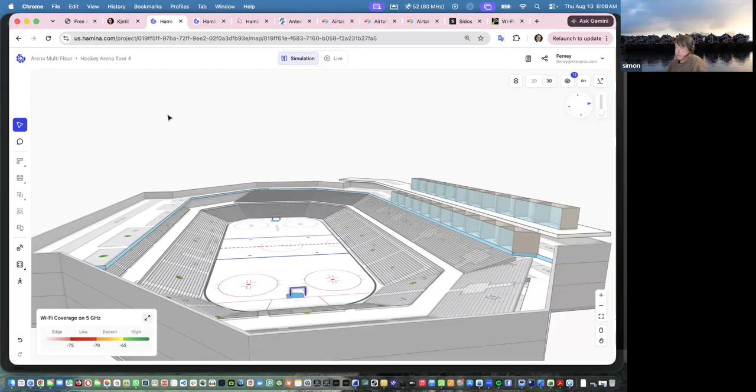I was just going to ask about the warehouse floor plan, where you have the ground level, you have a mezzanine warehouse with mezzanine office, but the floor plans you're given - the ground level is a full floor plan, but for the mezzanine level it's just that small little strip of floor area. So how do you handle that? I've had that happen, where they give you - what he's asking is if I go to a warehouse, let's see, sometimes they have the first floor with a lot of stuff, and let's say the second floor is just this small area. So they give you another small floor plan. So what you do is you import the big plan and then you import the small plan. Actually, we could probably do this - watch, let me see if I can just get a screenshot of this.

Let's say here. I'll just say we're going to make this a second floor plan, okay? So we have this as the main floor plan. Let's add.

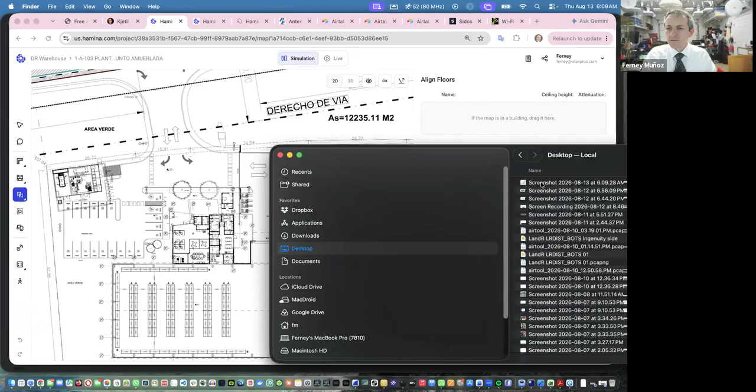Jerry said that I could just drag that file in here. Let me just see if... uploading maps, man, that's really cool. I just drag it in there and it's uploading the map. Okay, so now I have this floor plan and I have this one.

Let me make this floor 2 offices, floor 2 offices. Okay, so I renamed that floor plan. Now I create the building.

The first floor then is going to be this guy. The second floor, I'm going to put on top of that guy. But yeah, see, one is huge, the other one is just the office. So very straightforward, what I do is I just resize this

to fit on the area where only a second floor exists. This is going to be the exact same thing for the... okay, let me see, let me line this up.

Where are my eyes, Simon? You can line the circles, it will be easier. What was that? The two circles, if you line the two circles. If I line the two circles. Oh, like the circle, these guys here.

Let me just grab like these guys right here, and then let's see, try to stretch this guy out like that. Does that make sense? Yep. Okay, so now if I

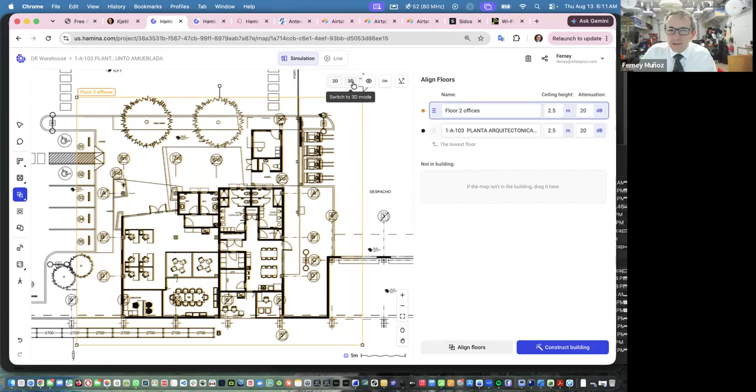So now that it's lined up, let's go to 3D. Holy smokes, isn't this cool? So let's see, of course there's a lot that needs to be done. It's not perfect, it's not gonna do the entire thing for you. That's what I experienced with the big convention center, but it gets you there, it gets you started.

We are on the lower floor, and now if we go to the second floor, it did a better job. And look at this. Now, if I go to sandwich these guys... oh man, isn't that cool? Look at that.

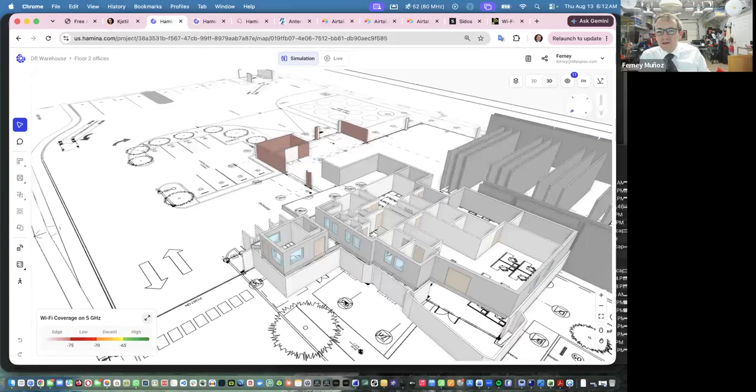I mean, yeah, there's still work that needs to be done here, but one thing I could do, since it did a better job on the top one, I can just copy paste that stuff and go to the first floor and replicate it really quick. But then now I just added, see, this warehouse, lower floor, and then here's the upper floor. And that's the same thing you would do in an office.

Did that address your concern, Simon? Okay, yes, thank you. All right, I'll send you a bill later. Hey, that's consulting, man. Thank you for bringing that up.

See, we spent like a whole week in Hamina, I didn't cover that, so thanks for bringing that up. And you know what happened, Simon was going to keep it to himself. He asked me after we were done with the recording yesterday, and I told him, like, why are you asking now? Why didn't you ask in class so we could let everybody know about it? So I'm glad you did, because now it is recorded, and now you know how to add when you...

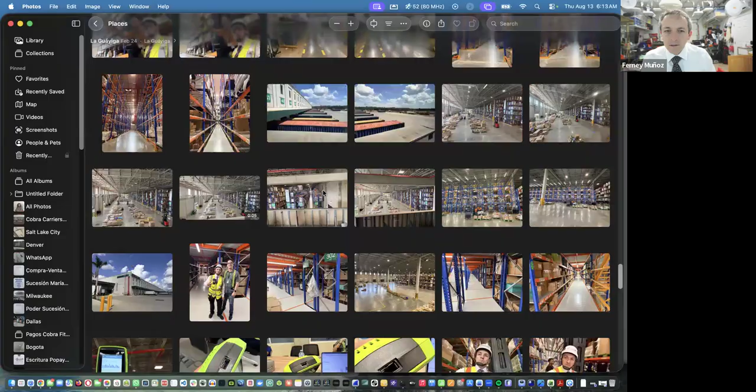This is the exact same thing that happens in warehouses. I think we were just here... this is not the place, but let's go to a warehouse where we had some pictures to show that. See, here in Santo Domingo, and that would be doing this area. So they give you one floor plan, sometimes just one floor plan, and then there are these offices stuck on top of each other. Or like what Jerry showed yesterday, you get the racks in the middle, and that would be like this area over there.

I probably have a better picture here. Hang on, because what he was showing us yesterday was, let's see, kind of like this area.

Uh-oh, I think power went out. If I lose you guys, let me know. I think a UPS just beeped.

See, there are the racks over there that go all the way to the ceiling, and this is a multi-floor area. There's one floor there, another floor, another floor, and a fourth floor within one. So this will be a good example of what we did yesterday. What he taught us was just having one floor that is really tall, with other floors in between that big floor. So this would be another way that if they just give you one set of floor plans, or a small floor plan, you're just lining them up on top of each other inside the big area.

Glenn: I've had this a couple of times where they gave separate small floor plans, meaning you had one big ground floor, but then different plans for the stages on top of it. It's quite easy if it's just one part, or if they are all together on one big floor plan. But if you have, let's say, the second floor split into two different plans, there's no way, as far as I know at the moment, of importing them in the solutions I used.

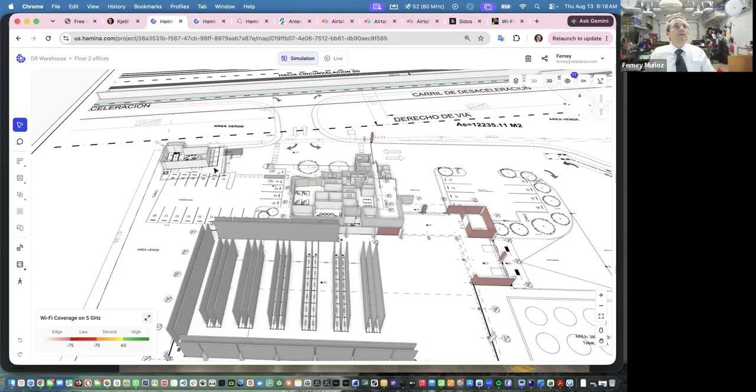It would be easier if you could just take a plan, say this is like with the points in Ekahau - you say this plan has point 1 and 2, and it goes on 1 and 2. This one has 3 and 4, and it goes on 3 and 4, and then it's done - the floor alignment points. Yeah, which is kind of like what we do here, it's just that we get it more visual.

But imagine that you have the one in black that you've done now, and also the one where your mouse was on the left top corner, that you have a separate plan of that one as well. It would be cool if you could paste that one on top of that one, within the same floor. Do you understand what I mean? I guess you could, because we're just designing as we did yesterday - you just bring that other floor plan, and then you would put it...

I assume that it then thinks there's a floor of 2.5 meters in between where nothing sits. Yeah, you'll have to just play with heights of things, as we did with the first round at the stadium, right?

I had to do that multiple times when they gave me those floor plans. I use this tool called Photopea. Where is it? Right there, this guy. Let me just open... I don't know, maybe that image I just got in.

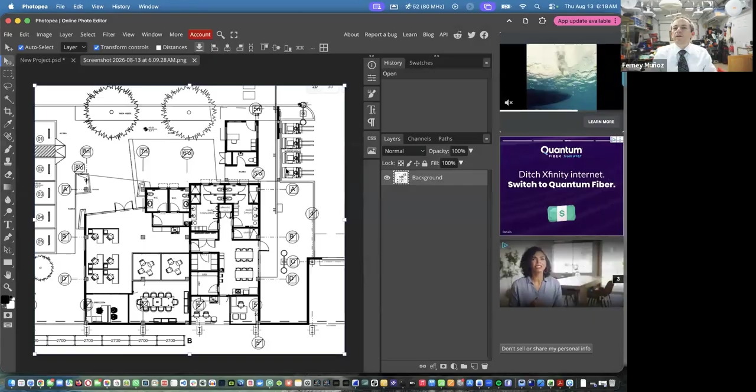So in here, you can just create a big canvas and put the images side by side. Like if I get, let's say this is one floor plan - let me go back. No, I did that in Paint.net, where you take the ground floor as one layer and paste the other ones on a second layer, moving them around to see where they are, so it roughly matches. But it would be cool if you could just do that in the interface itself. I had that many times, where they give you a multi-building campus with multiple floor plans, buildings that are side to side.

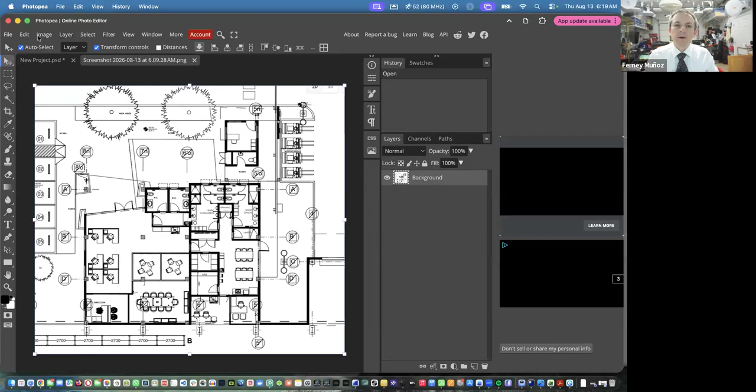So to do a prediction, I just had to do this, and then go to image and canvas size, and make this, let's say, 3,000 by 3,000.

So now a floor plan is there. Let me just move this guy to the side. Then I can just now bring the other image, open. Let's open the other screenshot. And then I'm gonna Control X this guy

and Control V that guy over here. Uh-oh, there you go. So Control C and Control V. And now I can just bring this floor plan, put it next to it. Where do they line up? Here, maybe?

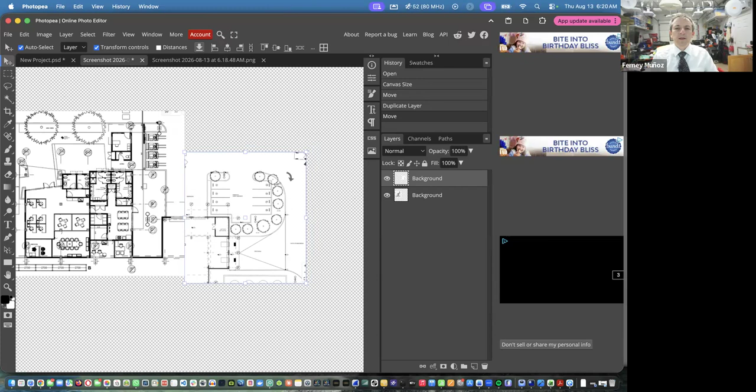Okay, and then now I'll have this in the same level, and then I'll just export this or change the size. Sometimes it's just time of playing with this stuff. But I can see if I flatten this image, if I go to image and flatten this guy, where do I flatten this? Well, I guess if I right click here and flatten image, now I have the image right there.

Of course, I'll be more precise. Well, I think that's precise enough, isn't it? And then this will be my floor plan. I can just export this as PNG or JPEG or PDF, whatever you want to export this as. And now it's just one floor plan in one level.

That happens sometimes, that they give you floor plans like in Excel, just boxes. They're not to scale, they don't have doors, they don't have anything. So I've had many times to go to Google Maps also to at least get the shell of the building and get the scale. Because if I don't have a scale, going to Google Maps, for instance, is one of the things I use.

If this is the building I need, let's say that Costco right there, and that's a warehouse, and that's all I have, then I'll come here, and if I right click on this corner and measure distance, and then right click and click on this corner, it'll just give me a straight line from those two points. And it says that is 137 meters, 138 meters. So sometimes that's what I use for scale, and sometimes that's what I use for at least the outside of the building.

Okay, but this one I had to do also because sometimes they just give you the whole floor plan of the warehouse, and then they give you a big floor plan for the first one, and then tiny maps, just an individual map. That's how you line it up and stretch it out in a way that it's like, oh, this is what's on top of that. And now you have a building. We go to 3D, and we can just create the building.

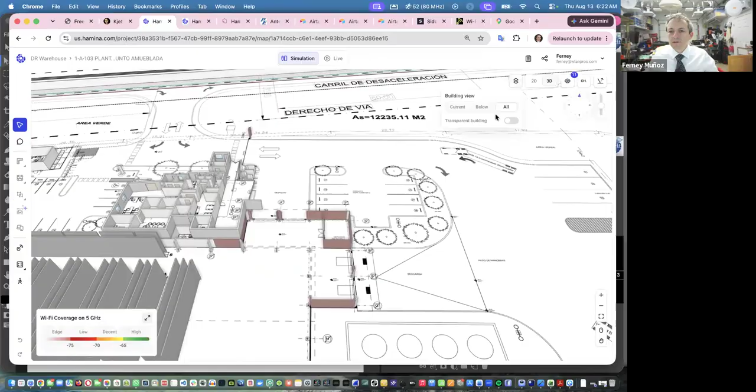All right, thank you, Simon.

We'll come back to Hamina because we'll be doing surveys later, and then we'll use all the tools. Remember, we also cover creating the reports, PDF, and sharing those links with customers. Or if I have another person that has a Hamina account, I can just come here to this button and share that, and I'll be sharing the project with that person. So they will have access to the project and they can work on it. You can have multiple people working on a design or multiple people working on a survey. So that's another way to share.

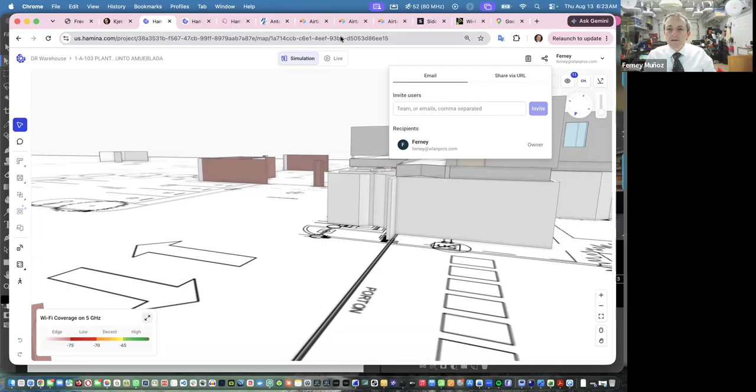SIDOS, did you guys create the account okay? SIDOS systems? Yes, I filled the form but I haven't received an email. Yep, same here. Oh. So has anybody received the email yet? Simon, you still have a question, or you just forgot to lower your hand? Put it down, man, it's going to turn blue.

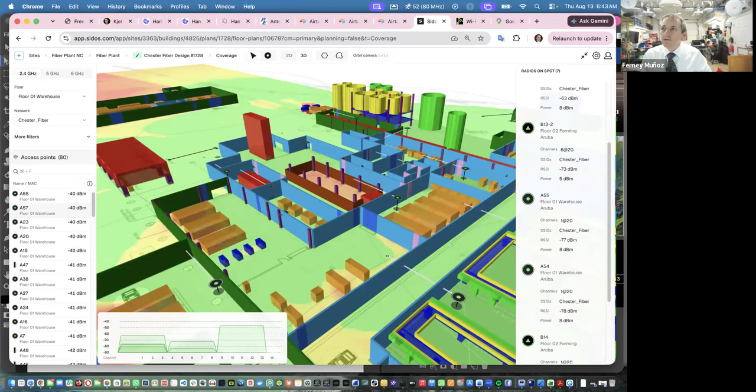All right, after a pause trying to figure out the accounts to let everybody in, we're back. So once you have the account, let me just, they've changed the interface a little bit. So you'll just go in and you're probably going to have a blank page, like it says new site. That's about it. Okay, so all of these are projects I've created.

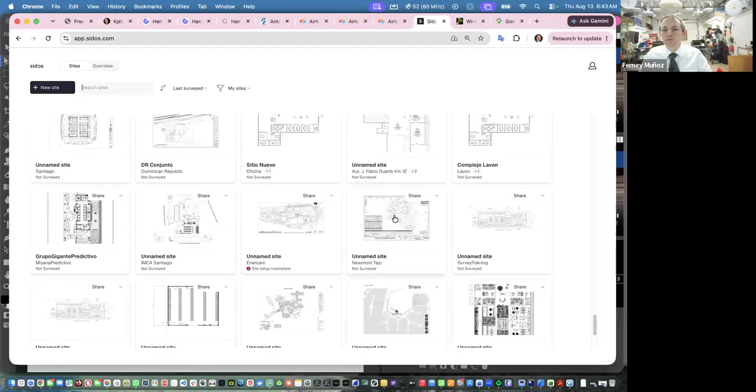What do you mean, Luke? What content can I be viewed? I think you were trying to share the floor plan and I couldn't, yeah, all I'm seeing is this content can be viewed here in the chat. I put them all in the chat. All the floor plans, you mean? Yes. Yeah, so you cannot see it? No, I can't see it. Who else cannot get the floor plans?

Are you on a corporate computer? Maybe if you have a company computer, you have restrictions on downloading files.

Luke, I'll send them to you. I've got them here, thank you. The website crashed again, application not rendered. Don't worry, I think I got it now. Oh, okay.

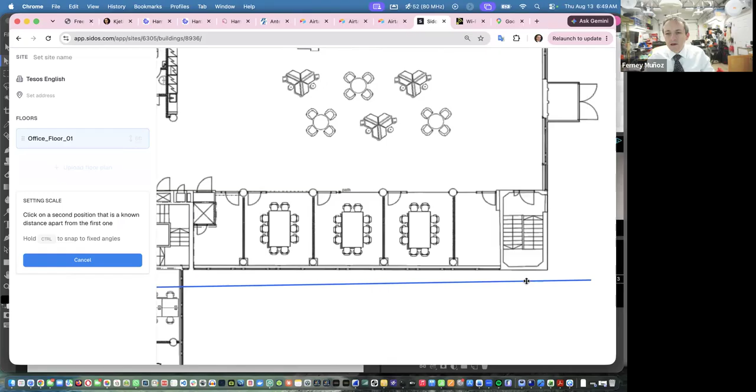So I'll just move it, I can zoom in, zoom out. But if I come over here to this other side of the building, that right there—you click, that's 14 meters. But it's asking in feet.

Let me see if I can change those settings right here, right now. If you go to the little man on the upper right corner, that's when you switch from feet to meters, okay? It should let me come in here and click on the drop down and change it from one to the other. Mark, thank you.

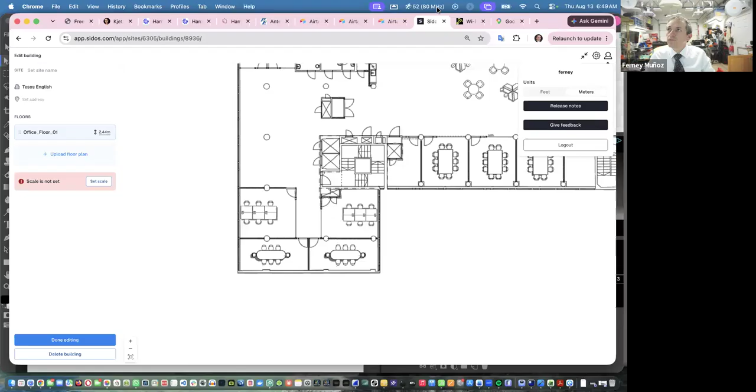So if we're on feet, that would be 46 feet. But since I already showed you, on the upper right corner where the little man is, you switch from feet to meters, and I'm on meters right now. So let's come back here and set the scale. From here to there—let me just click again, click here, cancel this. If I click here to there, that's 14 meters, and save.

Same as with Hamina. Once in the floor plan, you just go to coverage. You set the scale, and for you, this is an office, that's the door, that's a conference room. This is for the software.

This is absolutely nothing, it's just pixels on the screen. It's a bitmap. When you give it a scale, saying from here to there is 14 meters, it measures all the pixels in this floor plan and figures out how many pixels equal 14 meters.

It goes down and creates a pixels-per-meter unit. Now, one thing I can do is if I have the mouse right here and hold my shift key, wherever I go, it tells me that's 39 meters, that's 19 meters. I'm holding the shift key down. That's how I get the scale.

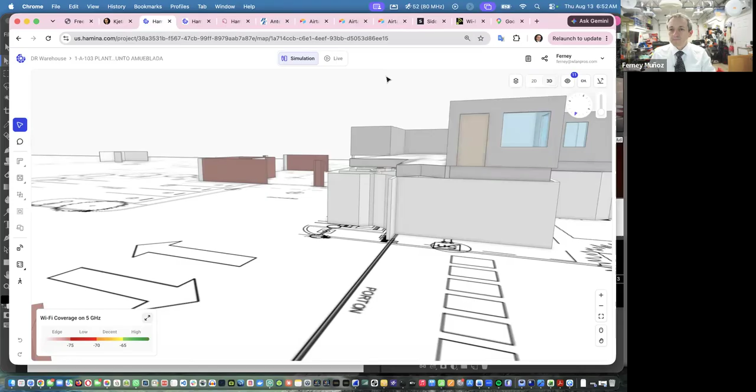That's great because when you're doing something like this, let me just switch to 2D. And let me bring a different one. Let's just use the new project we were using previously.

Let me go over here. If I select one access point, and let me switch to primary signal. There we go. If I want to measure, watch this.

If I want to measure, let's say, and see how far this AP goes, and measure the distance from here to there, to show my customer: look, that AP placed here covers all the way there, and is this many meters. If I switch to scale, now that access point gets unselected.

If I try to select that access point, I'm on the scale tool, so it's like, okay, what's the scale? What's the scale? No, I want to see the distance that this guy covers, from here all the way there.

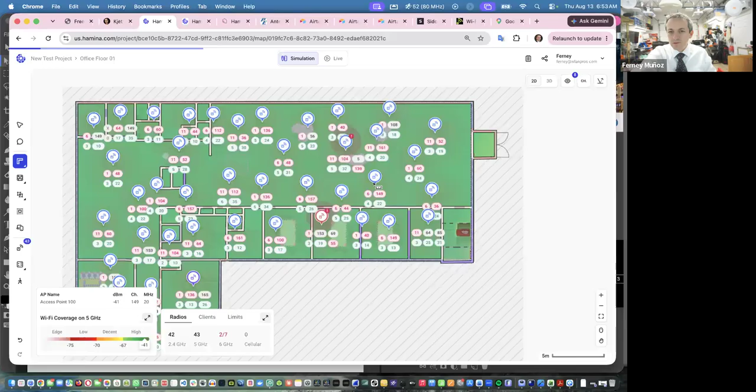So now I'm going to have to figure out this access point and go to the scale and measure from here to there. So it's kind of complicated to get distances.

Same thing for a survey. Sometimes you want to show a customer like, look, this AP is only covering like 5 meters, and you want to measure that distance. In here it's hard. In SIDOS, if I were to place an access point, I can just measure wherever you are.

You don't have to click or anything. If I'm right here and hold the shift key and move the mouse, I'm just moving the mouse, not clicking or right-clicking or anything. It just tells me from where I was till now, this is the distance. This is an extremely useful feature.

So I imported the plan, the floor plan. I gave it the height of the floor. I gave it the scale. That's it, now I stop. Your turn — go ahead, import that.

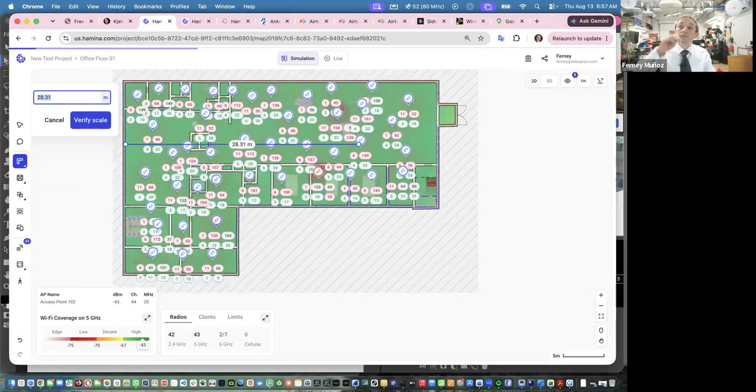Hamina is what we know, that's what we did for the last several sessions. Hey, we've done 19 sessions already. Can you imagine that? You believe it? Many of you have been in most of them.

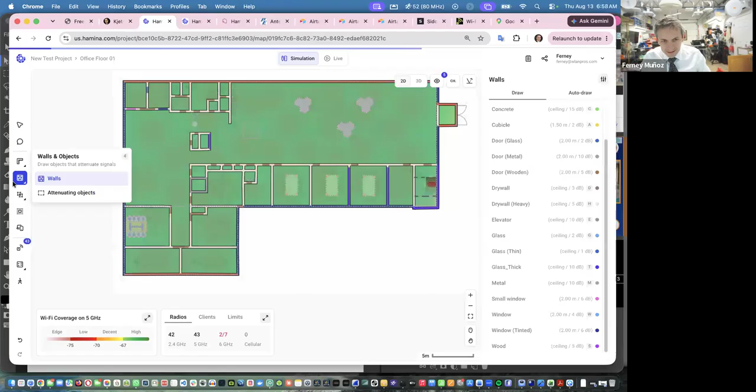So in Hamina, here to the left, we have all the options when we're designing the walls and the edit, and the nodes and the floors and all that stuff is in here. And every time you click something, then to the right is where the options for that something you have selected are. If you have a visualization like for align floors, then the building comes in here.

Up on top, that's where you have the project, and then you have the floor plans, and then you can add more floor plans, and then you can hover over and rename, adjust. You can duplicate, you can delete maps, add new maps. We've been playing with this stuff.

This is the navigation. Here is where you have, if it's simulation or if it's a survey or the live stuff that Jerry showed us, and then the sharing and all the stuff is in here.

Now in SIDOS, this is how it's going to work. The global settings are on the upper right corner on that gear. We will go and navigate and use all of this stuff later, but here's where settings for visualization, the heat maps, if you want to see the AP names, the AP channels, the AP channel widths, if you want to change the signal prediction assessment, the distance, the guess range, all of that's going to be here, okay, upper right corner.

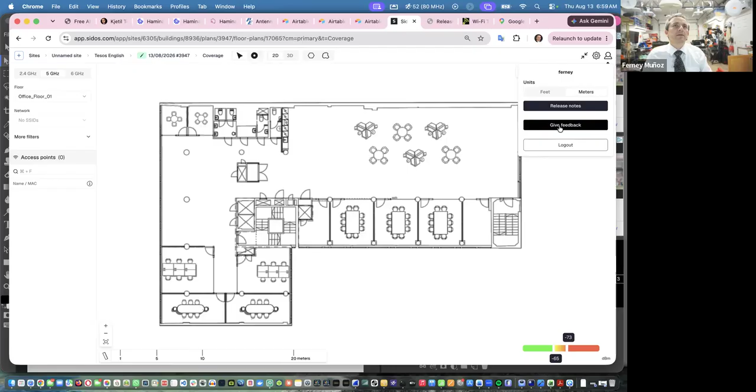The little man, that's where your account is. You see who's logged in. That's where you change units from feet to meters. Release notes will take you to the page with all the latest updates. If you want to give feedback, I think somebody asked me in Hamina if there was a site where you could give feedback, and I think it's not in here directly.

Yes, right here it is actually. There used to be a site where you would go, but now here you just give feedback. This is like the wish list, 'I wish I had,' and then the requests or the things that come up with more votes, I guess that's how they start working until like, oh man, if this many people are requesting import and export Hamina project as a file, then that's what I think how they define it. But if you have a new one, just create a new suggestion for a feature that you want.

That's the same thing here. Let's see, go feedback, just type it right there and submit. And here's where you log out.

This third button with the arrows, eyes on the screen, I don't know why it's there, but see, like here, these options, if I click these arrows, it collapses this left pane. Very conveniently located. Like, shouldn't this be like, I don't know, on top of this? I don't know, all of this stuff.

Hang on, I will create more now. Lots. Okay.

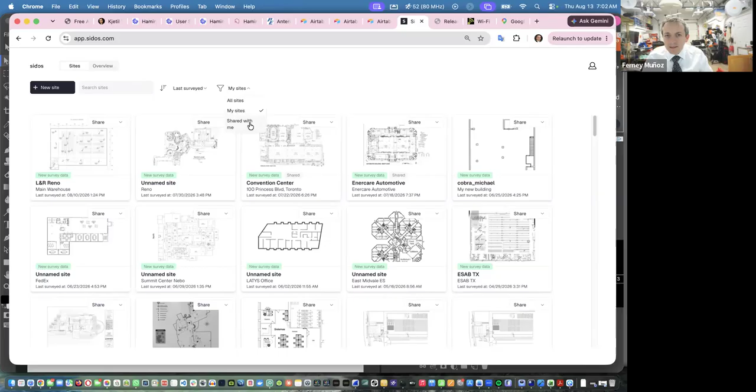See, under sites, if I click on sites, that takes me back to my home page where all my projects are. So my new project, I can sort them out by all sites, my site shared with me, and last open.

Let's see, unnamed site, so let's name, see, this site. If I come over here, let's rename site, and let's say this is office building. So in this same project, I could have the warehouse and have the office as another building, or as another project. I could just have multiple things under this project, this site.

Edit will take me back to that page where I set the scale. Sometimes you have to go back and reset the scale because they gave you a wrong number, or they didn't give you anything. So you can come back here and reconfigure the height or reset the scale.

So if I was wrong, let's just do it again and save. Then I say done editing, it brings me back here. So I have the site, the buildings, and in this case, this map.

Next to it, notice it has that little green pencil. If I click on it, it shows that that is a design. Right here is where I could add a task.

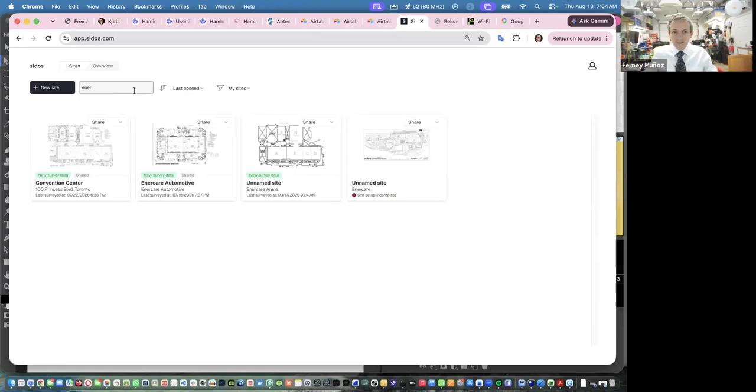Let me just give you an example. If I go to this place — this is a little tiny, small place in Canada. If I go to coverage, that's the place.

If I measure from here all the way there, that's 420 meters long by 300 meters tall. So it's a big place that we were doing. And then I started with a design.

Back in 2025, there is another place where even back then SIDOS was not very advanced in the design stuff, because they started with survey. They had the best, man, when it comes to surveys.

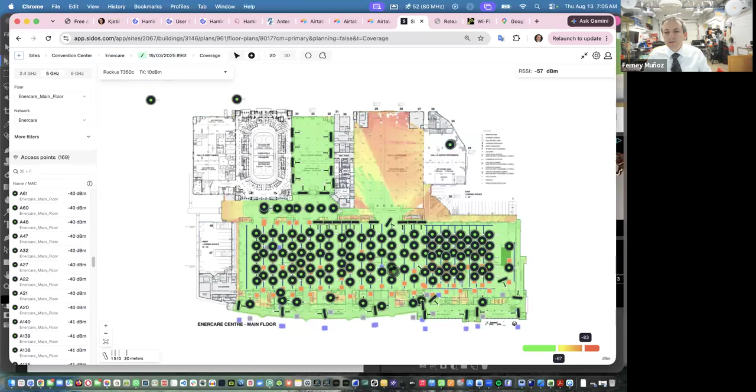But then in here, see, if I go to my project and I switch to 3D — this is that same project that I had for the convention center, but this one is using SIDOS. See, big project too, kind of like the factory we were looking at yesterday.

There's just one huge big convention center. All the beams and all the stuff is in here. So I did the design.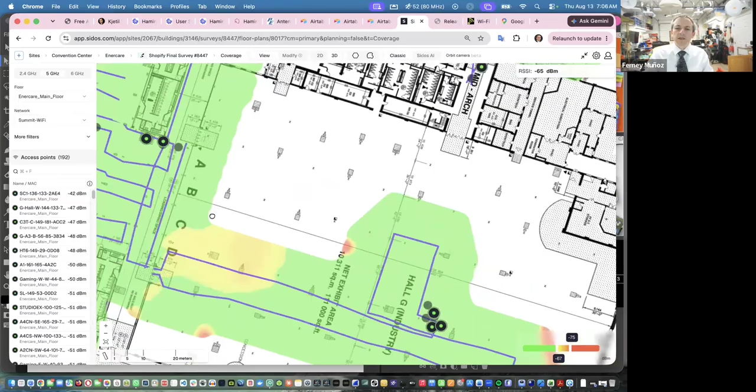Then when I wanted to do a survey, notice all of the other designs and surveys that have been done within this project — that's the latest survey. If I go to coverage, don't worry, we'll navigate and do all kinds of stuff with this later. So this is the survey.

So now if I select that access point, just switch to 2D here, it's showing me the coverage of that access point, the coverage of this access point, and all of them under the same site. Go back to sites — let me go back to my office building. So now with that, we've covered these first buttons.

This navigation in SIDOS, even SIDOS admitted, isn't fully intuitive. Their setup — even Matt, I was talking to Matt the other day — he says it's not intuitive, and he was watching my screen while I was doing some stuff, making notes specifically every time I clicked on the wrong thing, because they're trying to work out how to make it more intuitive to the end user. So it's not clear at all. It's horribly confusing. There's a good logic behind it, but it's hard work.

It is very odd, and you're gonna see, but it's worth it. As we go, add all of those things to the feedback, because yes, I've spent hours and hours with the developers myself doing a lot of stuff. That's why a lot of these things will have my signature on it, because I asked for them. I said, I need this, why? Let me explain and show and explain again. It's like, oh, okay — and then they did it.

So if I go to overview, right here is where I'm going to have my list of visualizations. Overview is usually what it dumps me into. Right now overview shows nothing because I don't have anything in this project, but overview becomes really handy later, okay?

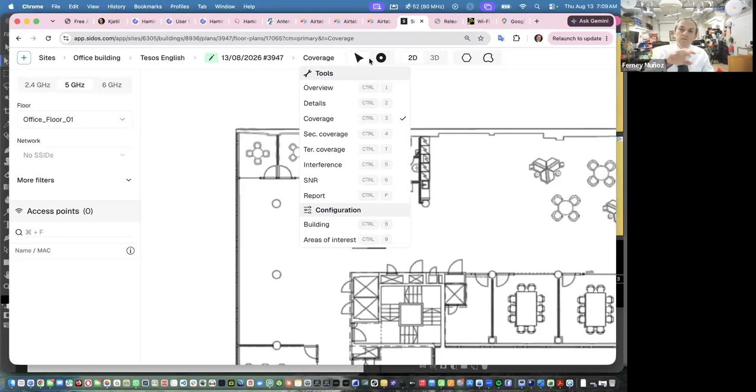Since I am in coverage, see, that's where the check is. Notice that I have the arrow, that's the equivalent to edit. When I click stuff, move stuff, then next to it is the access points. If I click on that access point, that circle, okay, doesn't look like an access point, but that's the access point sign symbol in SIDOS. Then here's the list of them.

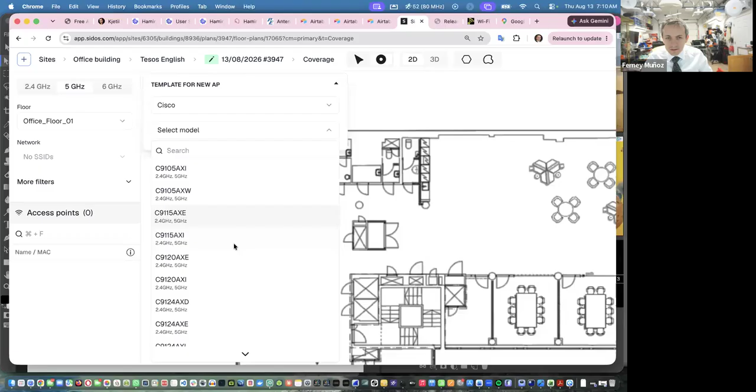We looked at this briefly when we were doing Hamina and comparing and contrasting. And again, we're not comparing and contrasting to show you who's better, who's worse. No, that's not the purpose of this class. The purpose of this class is to teach you how they all do it. Some do it one way, some have the menu down here, or they have a menu up there. Some show the antenna patterns solid, colorful, others showing like this.

And I like this better because of what we discussed about the energy that bleeds on top or below an access point. So I think this is pretty clever. Then I can see where the access point is in relation to all of the energy that is radiating. I can move that guy around. I can look at my 2.4, I can look at my 5 gig, and it shows the direction on which the antenna is radiating energy.

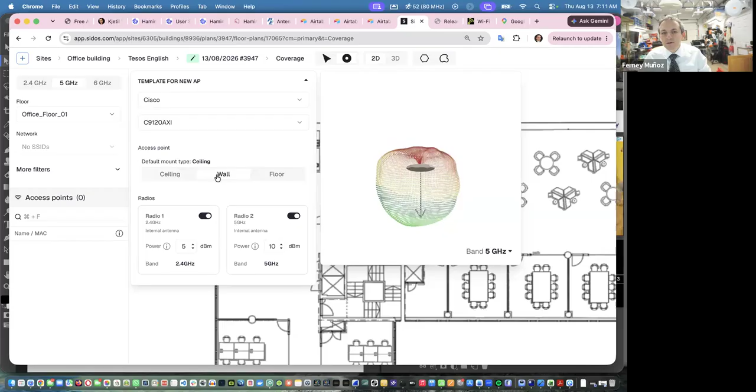If I were to mount this on the wall or the floor, here's where I decide where the access points are going to be mounted. This access point is designed to be mounted in the ceiling, but if unfortunately you're in one of those places that they ask you to mount the APs on the floor, on the wall like a clock, then you can design it like that too.

Okay, no account yet. Let's see, channel planner. I mean, I'm just checking the notes right now. I'm in the chat. Okay, so good.

So down below, if I have that AP mounted on the ceiling, radio 1 and radio 2, because this AP is dual band, just 2.4 and 5, doesn't have a 6 gig radio, I can specify what the power level is. And let me make sure, because there's always that question, is it EIRP or is it just the transmit power? It represents the conductive power of the radio transmitter. The heat map showed the total power radiated by one radio chain, the conductive power plus the antenna gain. So it's basically EIRP. Heat map coverage does not include potential MIMO gain. There may be an increase in coverage if both the client and the AP support multiple radio chains. Okay, just kind of giving you some background on what we're going to see.

And then you can just specify, if, let's say this is going to be at... no, okay, I have to go slow I guess. So if I'm going to do like 6 and let's say 12 on this guy, then I set the power. Now, if I hit my mouse button right now, I just dropped an access point.

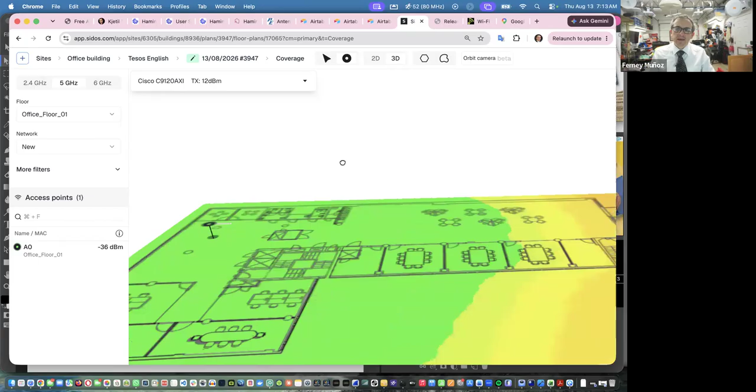Next to the access point button, then there is the 2D or 3D option. That's how we change visualization. To navigate in here with the right click and move the mouse, I can do these movements. With the left click, I can click and just move the thing around.

If I switch to 2D, I can zoom in with the trackpad, zoom out. Let me just resize this. See here at the bottom, it has a plus, a minus, or a fit to screen button. See, it just fills whatever I have on my screen. Let me resize this because I had it zoomed in all the way.

On the lower part, you see a scale, kind of to get an idea of how big this is. And then to the lower right corner, you have the visualization of the colors where if you click on it, you can move and slide these bars to set what you want your colors to be. If you're designing for negative 67, then where it's negative 67, it's green. When you want to set the lower threshold, like if I want to see interference at negative 82, and maybe make this one negative 62, then you're just playing with colors.

Again, green just means it's green. Doesn't mean anything. We're just matching a value in dBs to a color so we can visually identify this. Anybody colorblind in here, where you don't see green, you see brown, or something else?

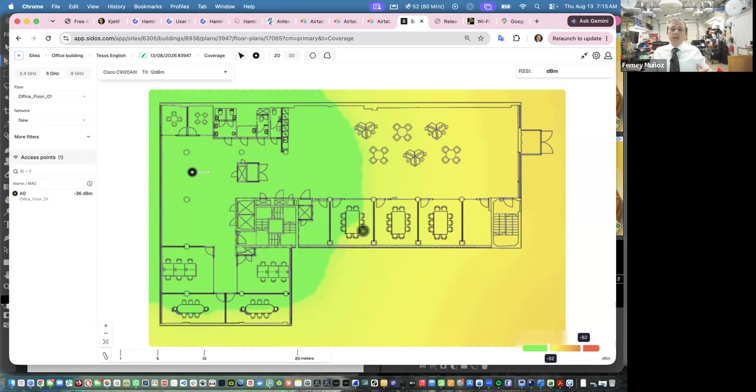You got to be conscious of that, because at one place I was showing the customer with these at a conference room. So, yeah, see right here where it's green, the signal is good. The guy was just staring at it. And the guy next to him said, Ferney, you just chose the wrong person in the room to show him green because this son of a bitch is colorblind. He don't see green. Oh, I'm so sorry. I was so embarrassed.

So how about this, because if I come here to the settings, I can change this to use alternate colors. And then when you ask, can you see blue? Oh yeah, I can see blue and purple just fine. So now I can just say, where it's blue, the signal is good, where it's purple, the signal is not so good, kind of thing. This is it, I don't know of any other colors in here, I guess those are the only two.

Let's see, I don't even know if we can change the colors in here. Do any of you know if we can change the color palette? Let me ask Gemini. Because that can become a problem in certain areas.

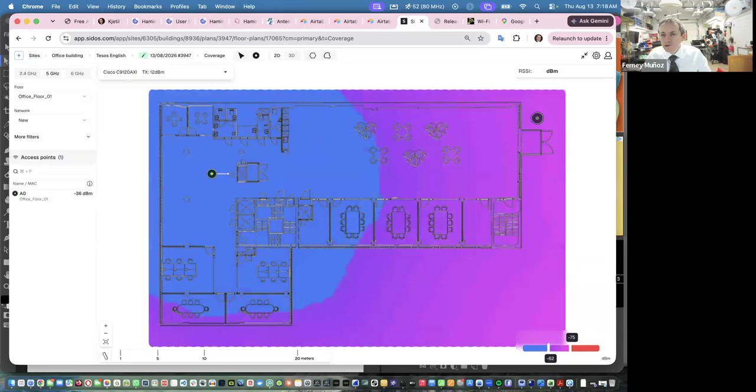So let me switch back to my regular colors. And that's it, the color means nothing. The color is just a representation of a value. And here's where you adjust those values.

Next to these 2D, 3D buttons, there is a hexagon and a little SIDOS Wave looking icon. This is what this means. If I am on this hexagon, notice that everything in here is a whole bunch of hexagons. If I click edit, and let's say I click this hexagon...

Let me zoom out of this. I know, I keep playing zoom in, zoom out. When I click on that hexagon, it does the signal prediction on that spot. It kind of doesn't look so smooth, but they actually call these bins.

I don't know, I think Mika, the CEO, explained to me once why hexagons and what that meant. I forgot. It's like, who cares? In their mind it makes sense what they're doing, but for us it's just like, I like the next one better.

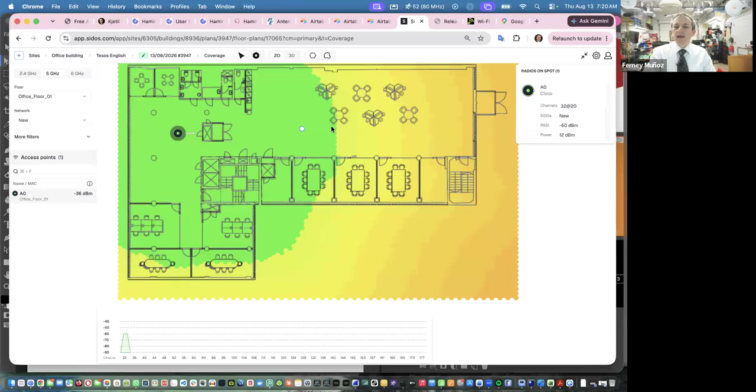See that button right there? If I click on it, it smooths the edges. See, it softens them, and I don't have those square box Minecraft-looking heat maps on the screen. I have a smoother rendering of the signal prediction edges. So that's the hexagon. This is the, I don't even know what this is called.

Okay, I have an access point. I haven't drawn any walls, I'm just showing you the navigation, showing you the interface around. Who is using SIDOS for the first time now? Anybody? Okay.

So we're going baby steps, just bear with me, we're learning where things are and some things. Can I ask a question? Yes, sir. Why does it use channel 32 in 5 gigahertz?

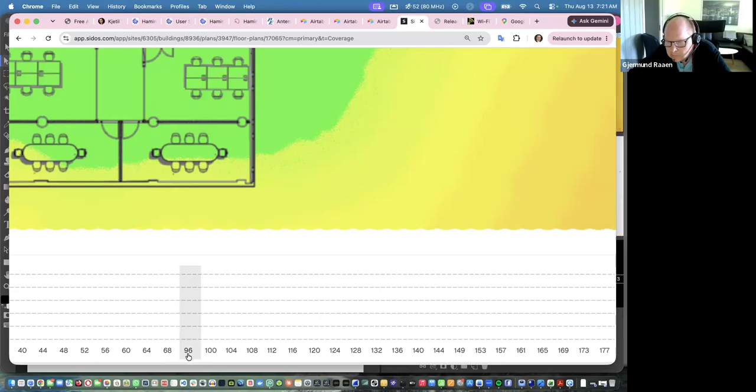Channel what? Oh, 32, good question. As a matter of fact, let me show you this. There's channel 68, there's also channel 96. Have you noticed that? And not here, channel 169, 173, and 177. Ah, okay, let me tell you why.

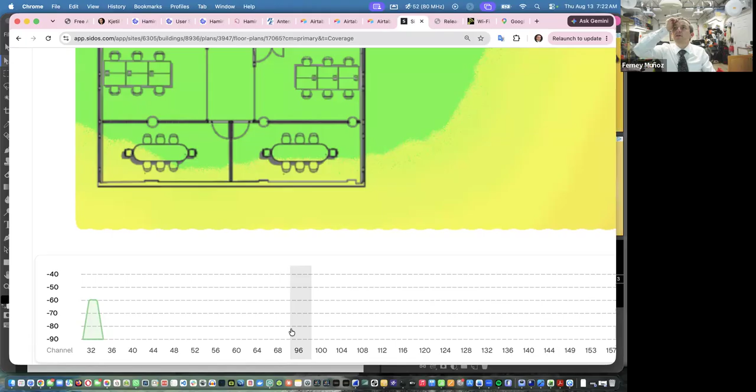It happens that we in Europe, we in America, don't use channel 32 or 96 or 68, but other countries, other regulatory domains do. Is it, where is Simon? Isn't it in Australia or New Zealand, somebody on that side of the world? I think in APAC, somewhere in Asia, those channels, let me just move over here.

Let me zoom out of this. Let me bring this over here. I think it's channel 32, and those ones are used in those regulatory domains. Somebody look it up, Guillermo, you're my ChatGPT.

Australia starts from 36. Okay. These channels in here, 169, 173, and 177, that's Uni 4. Here in the US, we got Uni 4 authorized years ago.

See right there? The problem is that some vendors say, well, yes, we got Uni 4. Ooh, big deal, we got 3 channels. But we already have 6 gig, and with 6 gig we have 59 channels. So why bother adding 3 channels to our firmware and our stuff? If now, I don't know, they probably had to do a lot of testing, and maybe it's just flipping a switch in the software. I don't know, but those channels are available.

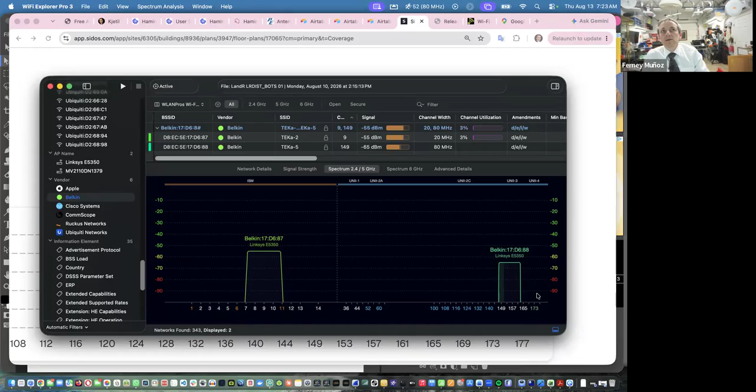Some access points have Uni 4 enabled, but the problem is clients. I don't know if the clients will do Uni 4. They might not. So yeah, you can have an access point there on channel 173 and nobody's going to connect to it. Maybe another AP, maybe for a point-to-point or a mesh link. I don't know. But those are channels that exist here in the US, but not in every regulatory domain.

Same with that channel 32. Anybody found out what regulatory domain uses channel 32? ChatGPT says none, but I'm not sure. Yeah, yeah.

Now I could be wrong, Gjermund, but I'm never wrong. Except when I'm wrong, which is most of the time. So don't take my word for it.

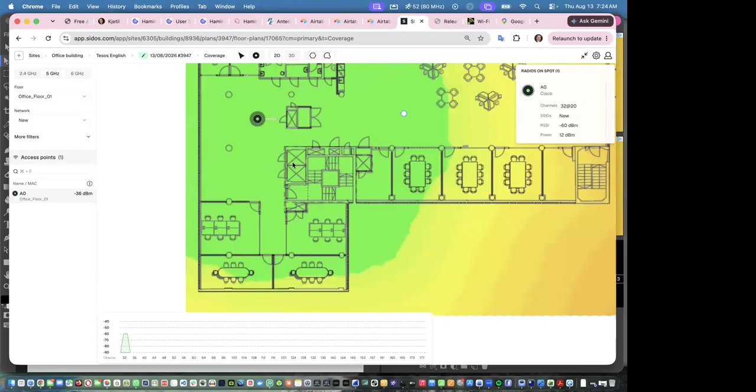Okay, all right, Simon, what you got? So is there a way, do you specify, as now you're talking about channels, or do you need to specify your country or regulatory domain in the design or the survey for SIDOS? Oh, good question.

Okay, let's see if I remember. Let me add this other, let me just add to the access point visualization, show the access point identifier, the channel, and the channel width. So if we have this access point, we are in coverage. Let me add a couple other access points.

Notice that now that I have more access points, okay, let me just place them like in any order. Of course, that's not how I would do the design.

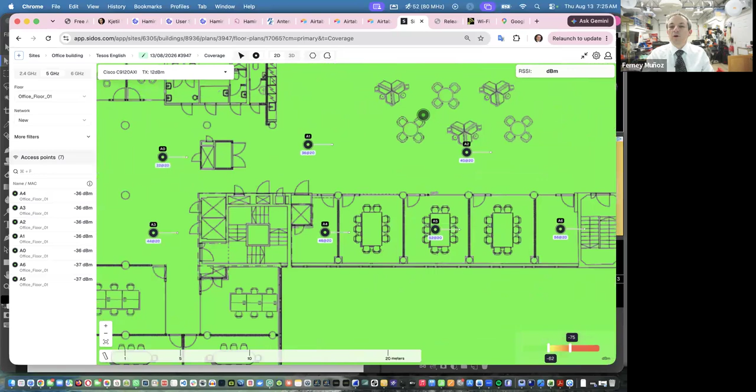But notice, and this is one thing I don't know if I requested, but as I zoom in to see the bigger numbers, everything becomes smaller. It's like Google Maps, like you see an address and I don't have my glasses on, and then I zoom in to see it bigger, and the things stay big. So what I have to do sometimes is this. I can zoom in, but I learned after doing it over and over, that I see it big on my screen, but you still see it small on yours. So let me just take a screenshot of this.

And if I come over here... come on. Desktop, there we go.

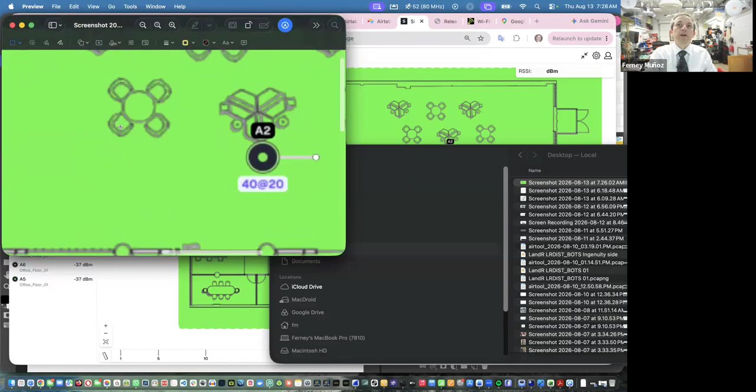Notice that similar to what Hamina does, it starts setting up the channels automatically. The first AP placed is on channel 32, which we don't use, Gjermund. The next AP is channel 36, then channel 40. What do you notice? Then channel 44, 48, and 52. It's placing them adjacent in that order. Like 36, whatever—well, that's not how we design.

Now if I go back from coverage to overview, I have some data—like 7 radios in 2.4 gig, 7 radios in 5 gig. It shows what channels I'm using in 5 gig and in 2.4.

So if I go to configure, here is where I pick and choose what channels to use. If you're in Europe and you're the 1, 5, 9, and 13 type of guy, you can choose those. If you're in Japan, you choose 14, and you let the software do the rest. Let me hit save, and then I'll go to 5 gig.

Here, my dear Gjermund, is where I would unselect the channels that don't work in my regulatory domain. I don't think there's a place where you can just say 'this is regulatory domain Europe' and it automatically disables whatever doesn't work there, or 'regulatory domain Australia' and it disables whatever channels don't work there. Isn't there? I don't think so, but that's a good feature request.

Yes, absolutely. Now you know what the feedback button is. So here, I don't need channel 68. You didn't. What's that? Yeah, no, you don't need to. I thought you clicked the wrong one, that was all.

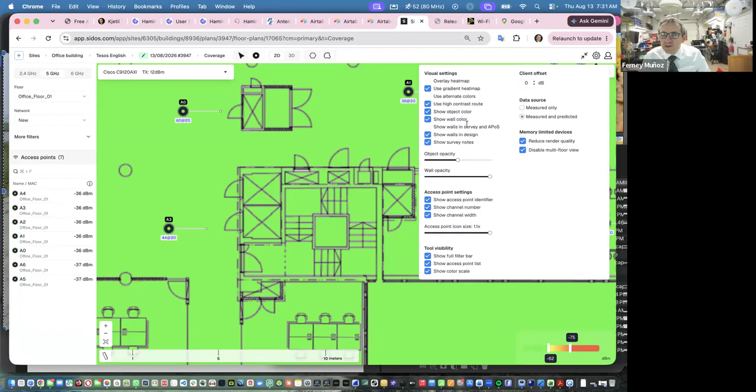The overlay heat map is like a transparency button that's really useful in survey. Here's what happens: if you don't have this selected, the map comes to the forefront and the signal prediction colors go into the background. Once you hit overlay heat map, notice the map is not as vibrant and strong as before. So when you're doing a survey, sometimes it doesn't show much.

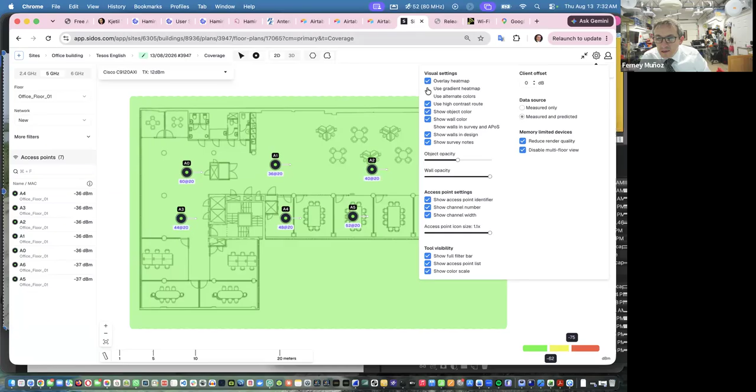I have no idea... oh yeah, looks like, see if you look at the colors here, if I don't have that selected, this is just a solid yellow. Gradient kind of goes from yellow to orange.

Use alternate colors, we already saw that. It goes from purple to green, or green to blue. Let me just click the edit. So that's the alternate colors, okay? It changes from the traditional green, yellow to purple and blue.

High contrast route, this would be for surveys, we'll get to that later. Show object color—once we start drawing walls and attenuation areas, this is where we change that.

Show walls in surveys and APs on a stick. I usually don't like this, but we'll talk about it when we get to surveys later.

Show walls in design—of course we want to see them, especially now that we haven't started. But once you draw them, they kind of get in your way. Once you do the design, you don't need to see the walls all the time, so here is where you come and disable the walls.

And survey notes, we'll get to surveys. Object opacity, wall opacity, we'll get to that when we start drawing. All of these are configurations for the project.

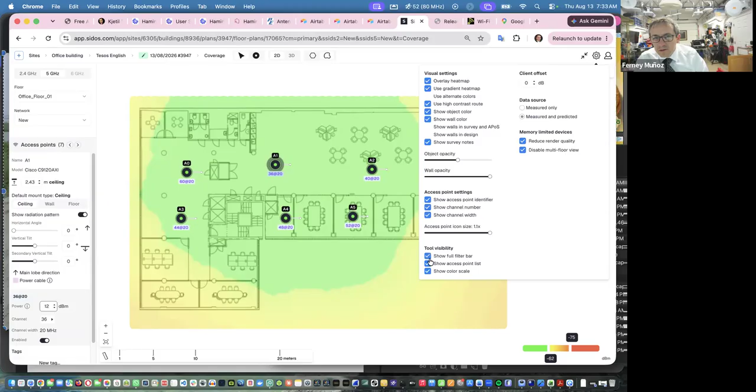Well, which one's this one? I think that's when you have something selected. Let me see, if I unselect this guy... oh, I wonder what that does. What is it changing? Nothing. I don't know what that does. Show access point list, that's this pane here.

And show color scale, that would be the guy down here at the bottom.

Okay, let me come over here. I just drew some access points, I just placed some access points in there. Wait, didn't I run the channel planner? Oh yeah, it did—it got rid of 32 and still placed APs in different channels, but look, they're adjacent, 36, 40. Let's run the channel planner again.

If we go to overview and run channel planner and come back over here to coverage, they're still there. So as you can see, this channel planner is not going to spread everything apart so they're not interfering with each other. It's there, it's not—it probably needs tuning, it needs work.

Okay, so far we have just looked at the creation of a site and multiple buildings and the floor plans in here. We have looked at the tasks where you can create designs and surveys in the same project. Then the next drop down, tools.

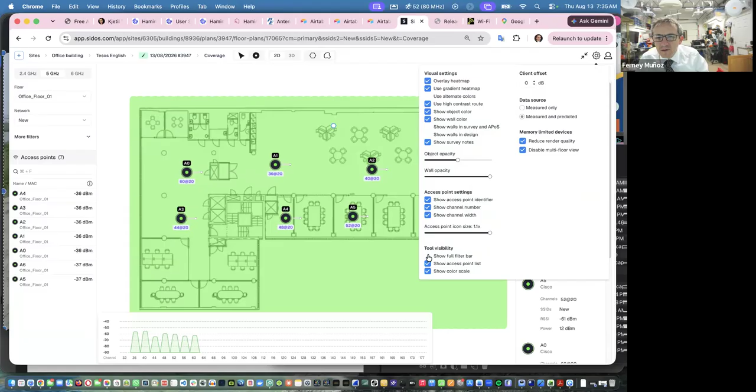Oh wait, hang on, what was the option here for tools? Oh no, the filter bar visibility. What's the filter bar? Where is the filter bar?

Yeah Jonas, as you were saying, this thing is not very intuitive, huh? Do we need to get Matt to join us for one of these? Yeah, one of these days. I think he's on leave now. Oh okay, it's not like Jerry—that Jerry on Sunday, whenever we need him, he'll just jump right there. But they're pretty good, like Constantine, he's always there, man. He's one of those guys you come Sunday or holidays or anytime, he's gonna answer the phone and reply and help. All of them are really helpful, so no complaints on that side.

Then there is the edit. On edit, if I want to move this AP, that's what I would do. The circle here shows up because I'm under coverage. Watch, if I go to overview, these other buttons go away. Now I have different options here and there.

If I go to details, I have other filters and details on the access point. This is extremely useful when we're doing the survey part. After details, coverage, then now we have different options.

If we go to secondary signal, if we go to tertiary signal, if we go to interference, notice that I would have different results. Now it all looks good, but if I go to 2.4, not so good. Why? Because there is interference.

This is actually really cool when you're doing surveys, more so, because if I click on an access point, it highlights what other access point is on the same channel with this guy. That's extremely useful, so I'll just place more access points in here.

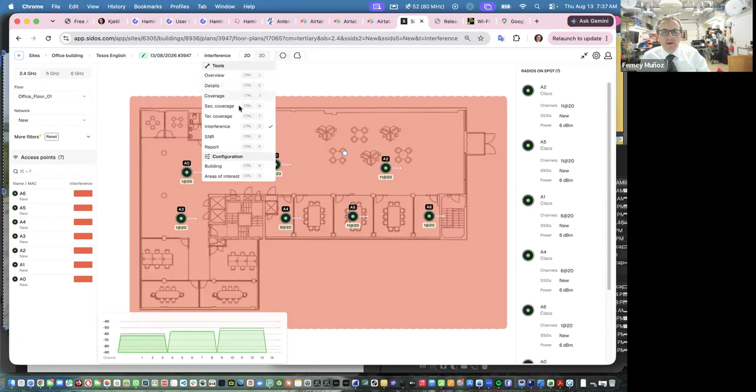Coverage. Let's go to access points and let's just click, click, click, and saturate this. One AP per classroom, one AP per room. See, a dream of every salesperson. There we go, I just gave you a bigger bonus, Tom.

Look at that. So now if I switch to interference and click, let's say here, it shows the spectrum view, or well, you see a tower, okay? If I click on one access point, it highlights and hides pretty much everything else, and only shows me the APs that are on the same channel as this guy. That's really cool, that's really helpful.

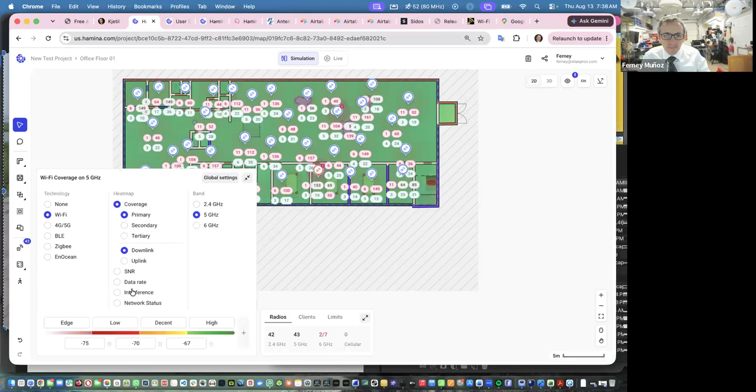Because if I look at interference on other software, let's see here. If I'm on the interference visualization, then let's say I select this AP, it highlights, it puts a shadow on the other APs on the same channel. See over here? If I select this guy, it only shows me like two, and I know I have more than two APs here on the same channel. Well, four, I don't know.

I like this visualization better. It's easier on my eyes, especially when you have areas that are really congested. And this is nothing, guys. And design is like, who cares?

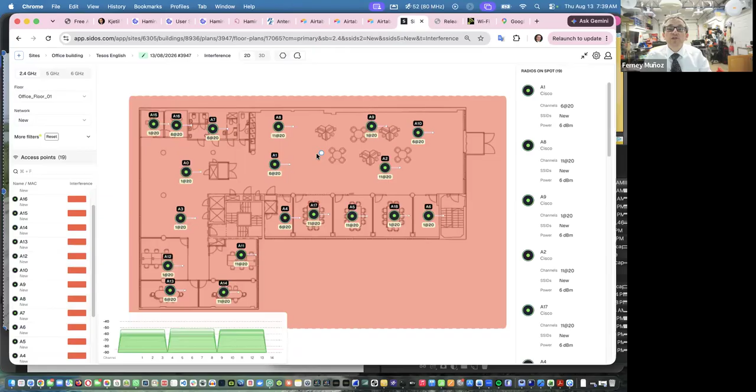In survey, when you're doing a survey and you want to see, let me just show you right now. Why not? Here, let's go and look at this guy. Watch this, if I go over to interference, let me unselect this. Oh, I've got to change the SSID. Let's change the SSID to... Oh, it's slowing down, it's a big project. Hang on one second.

Refresh. Okay, so if I select this guy, it shows me what other APs are on the same channel as this guy. Watch this, if I hover over, I'm not clicking, hover over one of those other APs on the same channel where it gets really dark red, it shows me where those two APs meet.

Like the signals. If I click on this guy, on that guy, on this guy, how about that guy far away? It's like less, there's less interference between those two. But as I get closer, it's really strong because yeah, these guys kind of see each other.

Now see that white guy over there? And that white guy over there? These white guys are not in my network. The SSID that I have over here, let me just select this guy, see that guy? Is this Summit Wi-Fi. See? Summit Wi-Fi is the SSID. This guy on the right, you're going to see that it's announcing the synapse, or synapse, whatever that is. It's another AP.

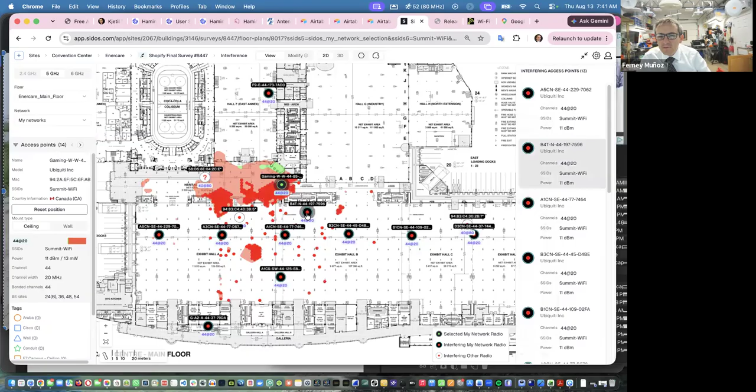So the white ones are not my APs. Who's this guy? Hidden, it's a hidden one, a D-Link access point. So these are on the same channel, causing interference, but they're not mine. These black and red, those are my APs on the same channel.

So I think this is extremely useful and helpful when we're troubleshooting. Like there's interference and yeah, you put the mouse right there, it's like, yeah, it's red, but who's interfering with who? Well, if I just click one guy, then it's going to show you who's interfering with this. That's really useful in my mind.

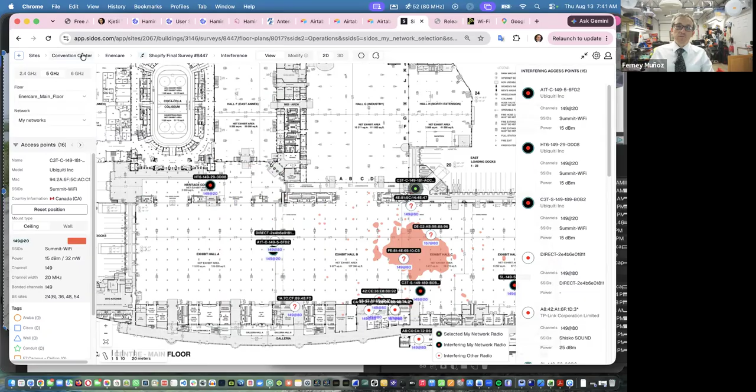So let me go back to sites and let's look at the office building. We were looking at interference. Okay, now if we look at SNR, I don't know, SNR is one of those visualizations that I don't really use, kind of like a thing.

The report, we'll talk about reports later. This is where you would create the reports and then build them. Here's where we would draw the walls. And up here you have walls, objects, floors, slopes, windows, and doors. That's it, pretty simple. If I go to walls, I am on walls.

We are almost towards the end of this session, but today was an introduction anyway. Okay, get the account set up, get familiar with the interface, navigate through it, play with it.

If I am on walls, there is no auto draw. I spoiled you with Hamina. We all got spoiled on that first round because you bring in the map and boom, it draws walls and windows and doors and everything for you, and we were done in the first five minutes. Not here. Here we do have to manually come and draw stuff. I know they're doing some stuff with AI, they're working on it, and I'm sure once they catch up it's going to be as good as their survey product, which is awesome.

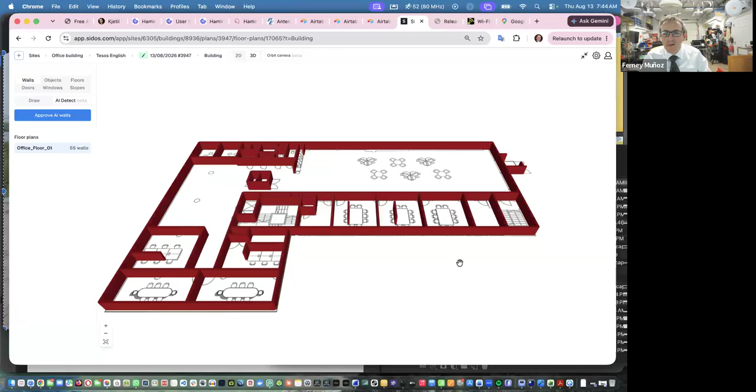Oh well, that's a start. It reminds me of the beta, like when Ekahau started the beta for AI detect. Yeah, it was kind of very similar to that.

This is something. If I want to select something and delete that wall, I would have to switch back to my draw. See, I'm in walls and draw. Then in here, if I click on it... let me see, come on. If I right click on it, if I right click on that segment, it shows me the height, which is the height that we set at the beginning on the map, that everything goes to that height, okay, and you cannot go any higher.

Height, this will be the top of the wall. The offset will be the lower part of the wall. Right now it's set to 0, so it goes from the ground up. See? It goes from the ground up. If I change the offset... come on, let's make it 1 meter. There, 1 meter.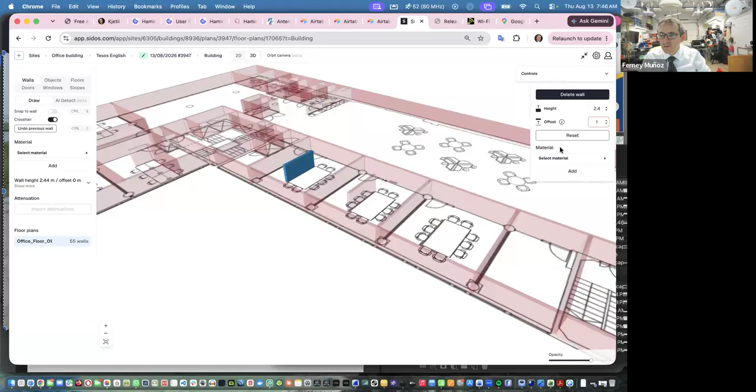What's it doing? Let me go to 2D and let's see. How about if I do 0.5? What is this doing, not liking it huh? It might be not going higher than the ceiling, that it takes the height and the offset together and they can't be higher than the ceiling. Oh yes, no, because offset will just subtract. This is just like the top is not higher than 2.4, but then the bottom should just change and be higher. But there's some bug right here.

Let me just, so I have the height and the offset. Now this offset is not the offset of the client, I know we always talk about the offset of the client, how this is not that offset, okay? Height of space between floor and wall, yeah. Here, let me refresh. Sometimes, and this happens in Hamina too, sometimes if something's working funny, you just refresh. Let's see if this helps us in any way.

Let me go to wall, let me select this guy. And I think there's something funny with this thing, 0.5 meters.

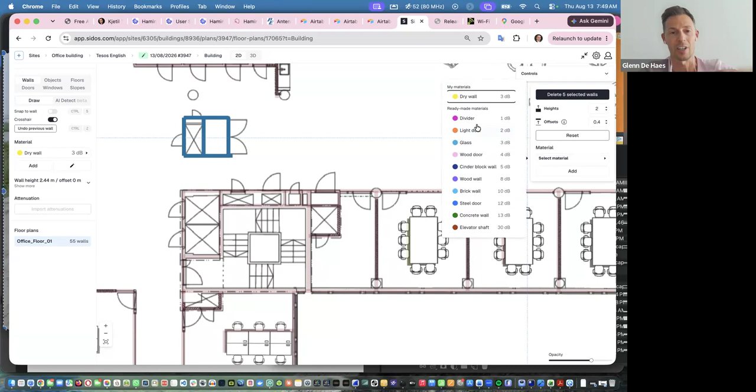Yeah, it depends on how they define it. In Ekahau AI Pro, you have the top and you define the bottom. But they also changed that in the online version, where you just say this is the height where it starts, and then from there it goes this high up. You don't do that every day, so each time you do it wrong the first time, because you're so used to thinking the height from the bottom up, and now suddenly it's from here and you add that size to it. So they do have to clarify this, make it more clear.

Now let's say this is a divider wall, cinder block. If I change the material to cinder block, let me just click outside of that area - now this is cinder block. If I go to 3D, there it is.

The drawing of walls - let me just, of course that's not a wall, let me delete it. I have to go to 2D, and if I right click and just press the delete key... backspace, delete didn't work, backspace removed it. Also, I can just right click on this guy and hit delete wall.

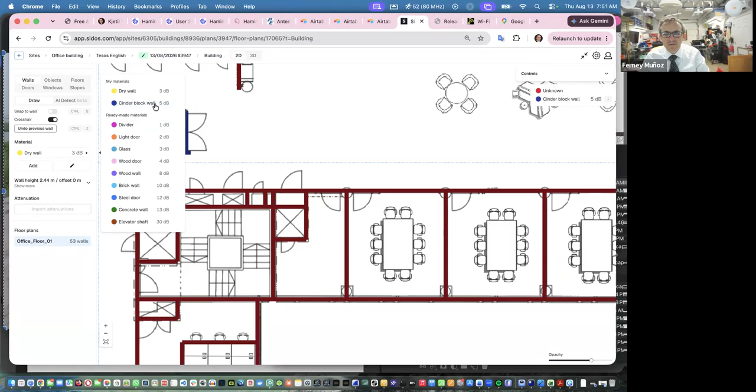If I want to draw a wall around this guy, I'm on the building menu, Control 8, I'm on walls, and right below it says draw. Then I have the list of materials - very simple, 1, 2, 3, 4, 5. There's no... oh, there's 5 in there, no 6. I know Hamina's got a richer list of materials, and you can create your own. You can create your own here too.

But some people don't even bother with that, just say they create materials like wall 1, wall 2, and then 1 dB, 2 dB, 3 dB. The name and the color is just for us humans to say like, oh, that's glass, oh that's a door, and we add colors to identify things. The software doesn't care what you call it or what color you give it - it just looks at the dB attenuation, like what's the attenuation index of this material, is it a 1 dB or 2 dB material. You cannot define in here - let me see if I can edit - no, you cannot define the thickness of it.

If I want to draw a wall around here, the stairs, let's say I'm going to choose the material - let's say that's going to be elevator shaft. Because the elevator shaft is here, but I'm going to just draw it here. Then if I click and click and click, right click, I finish that segment.

Let me just come out here where there's nothing and show you a couple things. If I want to draw, click - notice there's that 45-degree jump. If I need to come in between, I would hold the control key. I'm on a Mac, I don't know if in Windows it's the same, but if I hold the control key, it releases that 45-degree jump, and then I can be more precise on where I want to drop those walls.

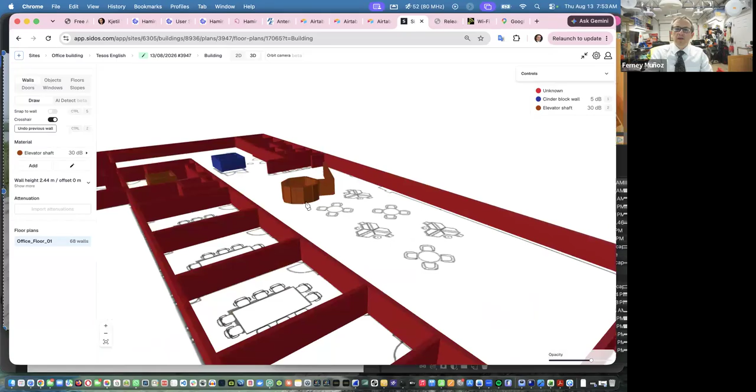Walid. Hey, how do you say your name - Walid or Walid? Walid. Walid.

So do I have the option to duplicate the walls like in Hamina and edit it? Oh, like duplicate the material? Yeah, you can add one, but as you can see, it's not very rich, like changing transparency. The contrast is abysmal. If you come here and have, I don't know, a wall, and go to settings, these are all of the settings that you have for just one wall.

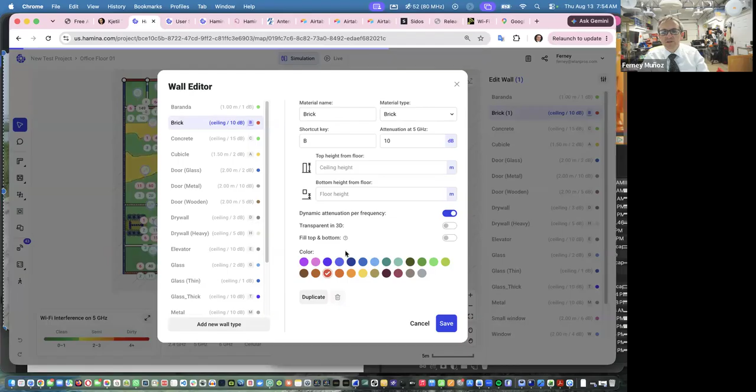In SIDOS, it's simpler. We have to keep one thing in mind. When things in Ekahau kind of went south and some people left and started Hamina, and some other guys from Ekahau left and formed SIDOS. Some guys dedicated themselves heavily to design, 3D, cloud, all these visualizations - design was their thing.

That's why it took them like 2 years before they even had a survey device, and it wasn't even theirs. The first device they used is the Ouster Nomad, which is not a Hamina device - it's another company that built it for them. They teamed up and built it.

So that's why Hamina is awesome - number one when it comes to design. They spent years training models, training guys, taking customers' requests and making it so cool.

The SIDOS guys also came from Ekahau. They left, and the CEO, he's an engineer - a hardware guy. He said, I'm gonna design a really cool Wi-Fi measuring device. They started working really heavily on the survey side of things. That's why they have a better device.

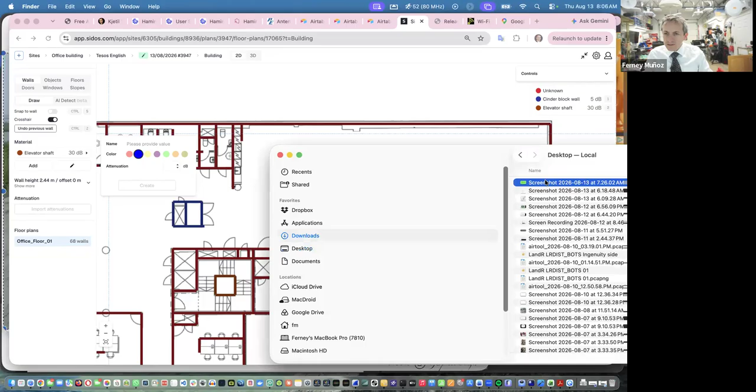Let me just open these two files that Walid sent. That's one, that's the other one. Yeah, Hamina just makes it... it's spectacular. You show this to customers, and it's easier to explain, easy to understand, easy to visualize.

You have a lot of time on your hands, Walid. You're playing, it's like a kid at Christmas time. I was playing on it trying to make sure I understand it correctly, and it was fun. Yeah, and that's how we learn, just playing, you know?

Mark asked about the SIDOS device. You buy a subscription, they send you a device. You don't have to buy the device, they just send you one because that's a SaaS. Your license expires, then you ship it back. I don't know if they're going to have options to sell it in the future, because that's the only device of all these companies that is useful without anything else, without a license. You can just ship it to somebody and have them do stuff.

Once we get to the deep survey stuff, I think that's really cool, I just don't know how to do it yet. We're all going to learn here in this class how to use deep survey. We'll get Matt and Constantine, we'll invite him over, same as Jerry came. I know Constantine is going to come help us, and we all are going to learn.

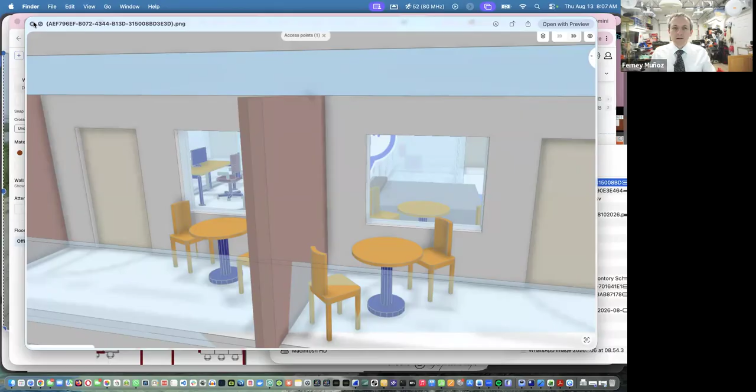So with this, my friends, we get to the end of session 373 of Tesos and Wi-Fi. Today we started by answering a question about Hamina on how to create buildings when you have one floor plan that's really big and the next floor plan is only a portion of it. Like in the warehouse, you have the whole warehouse for one big plan, and then there's just the offices in this little place. We covered that at the beginning, so maybe you want to skip to that. But you basically stretch out, get the small portion, and then stretch out the overlay of the second floor where it matches the first floor.

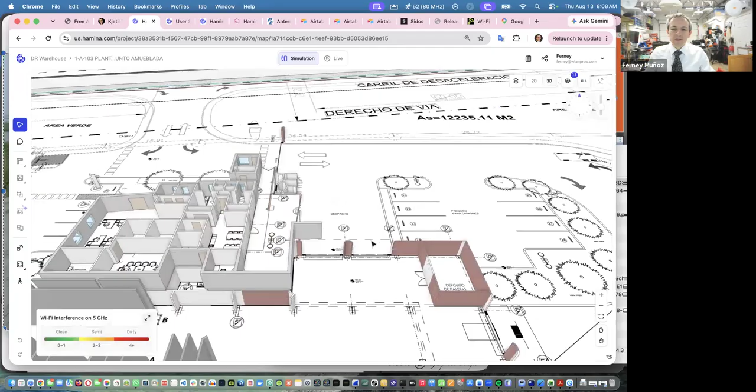And once you go to 3D, there it is. It just creates that and places it right there.

Then we jumped into Sidos. We had just an introduction today about the interface, how we're going to be using it, how we navigate it, where the options are, the different places where we can find and configure the visualization of the tool. Yes, it's not as slick and smooth as Hamina.

We're going to get to attenuation objects, we can draw doors and windows, and then there's some really cool concepts about the floors. I'll show you that too. And then they also have the slope areas. We'll figure out how to draw the stairs. We'll draw the stairs, and yeah, we can do really cool things with it. It's just that there's manual work involved, but it's possible, okay?

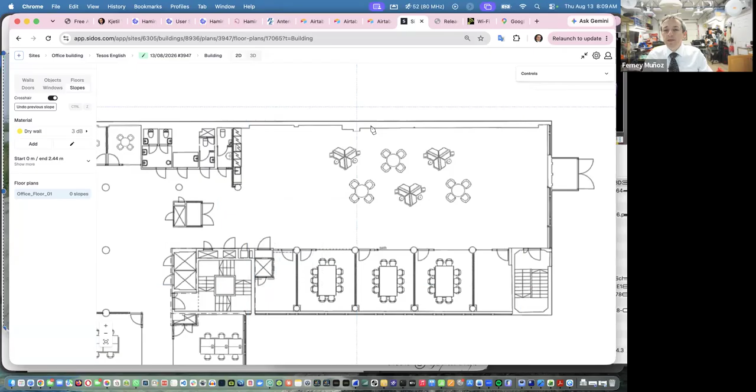It's really cool because we can also do a lot of these things and navigate it. They have the 3D stuff. And this is some of the sites that we've done. One was that plant that we showed yesterday, with all of this stuff.

Oh, I'm on the survey, AP on a stick. Let's go to the design. This is some of the stuff that we can create with Sidos.

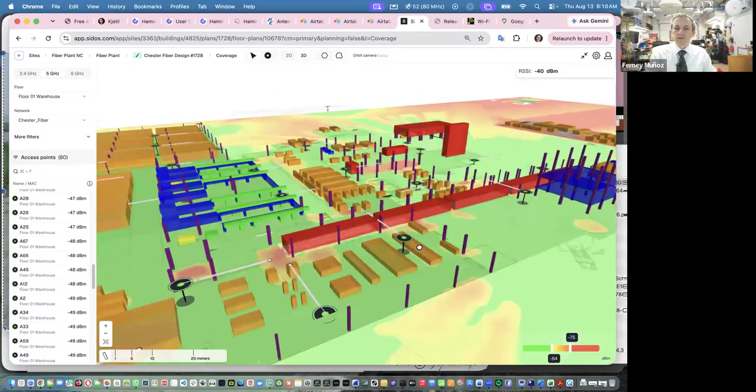The fact that it's not as slick doesn't mean that it cannot be done. We can just get a lot of things accomplished with Sidos. There's lots and lots that we can do, okay. It just takes time, but it is possible.

We're going to be covering the rest of the week more of this Sidos stuff, learning how to navigate, how to draw stuff, how to design attenuation areas and columns, and how to draw things throughout.

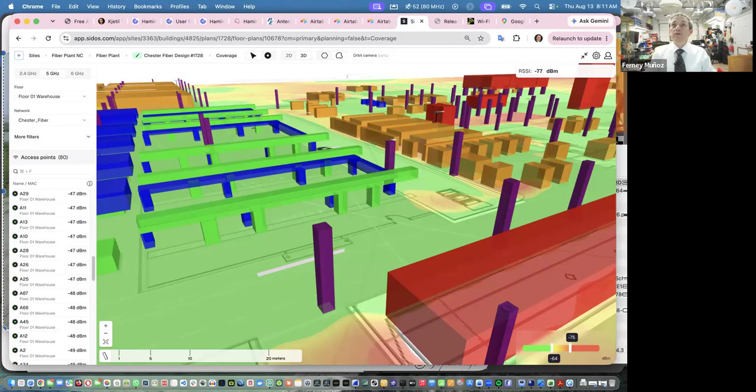Thank you, tomorrow we'll have more Sidos. Let's learn Sidos, that's my favorite survey tool, man. Hopefully they will catch up with the design stuff, but let me tell you, wouldn't it be perfect to have a company that has the Hamina design and the Sidos survey and all the cool stuff they're all doing? But oh well, this is what we got. The best thing is we're learning about all of them here in this class, for free. Have a beautiful day, man.